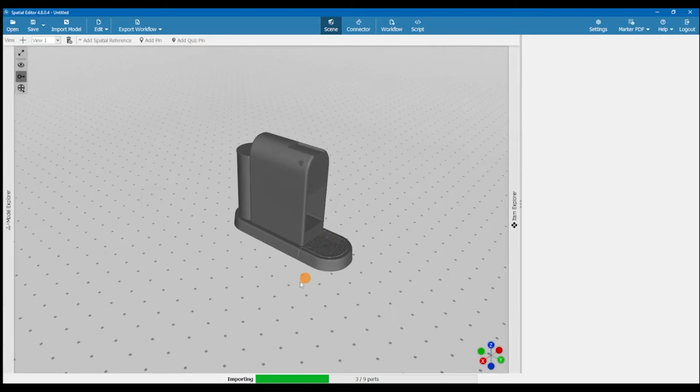We can see the scene is empty, so we import a model. I'm selecting a coffee machine model here and clicking on Open. Now we can see the progress bar with our model being imported. This might take more or less time depending on how large your model is and how many parts it has. In the meantime, we can play around, zoom a bit, check our model out, and wait until the importing is finished.

After this is done, let's go ahead, click on a part and go to Top Assembly to select the whole model. We can see here on the right that by default our model has been imported as a millimeter scale, but we can change this unit at any point in the workflow.

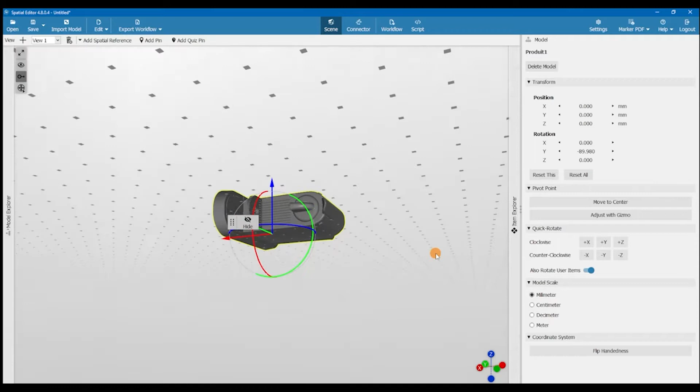We have the quick rotate menu where we can move the model with or without the pins and markers, but here we have it by default with. We can change it here on the side, but let's revert it back since our model was looking okay from the beginning. But if your model looks a bit wonky, you can use this quick rotate menu to put it looking up straight.

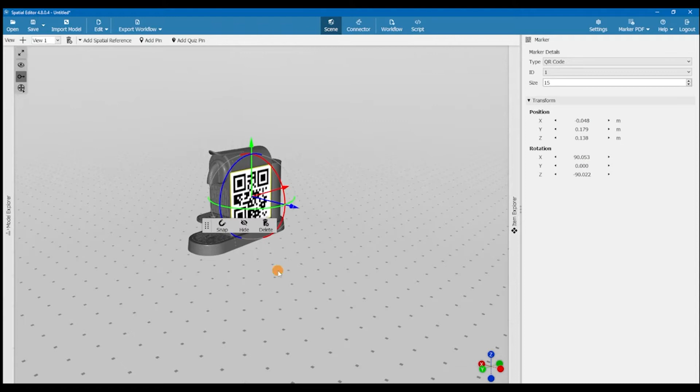And we are ready to add our spatial reference to start with our workflow. So we're selecting QR marker, we snap it on the model, and then we're using the transformation gizmo to move it around. We'll put it here on the side. I can also use the menu on the right to change the position or the rotation. Just make it looking upright here.

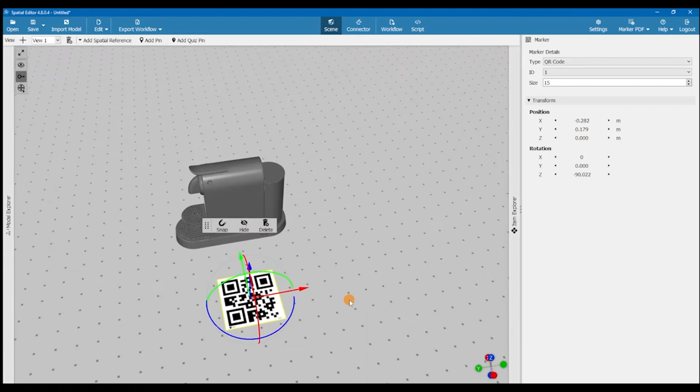I could also maybe make it sit on the floor, so zero here. Now that it's nice and flat, we can move it a bit closer maybe to the coffee machine, make a bit of space for the next marker. I can additionally change the size. Here I'm opting for 10 centimeter size, just to match our next marker. Maybe scoot it a bit closer.

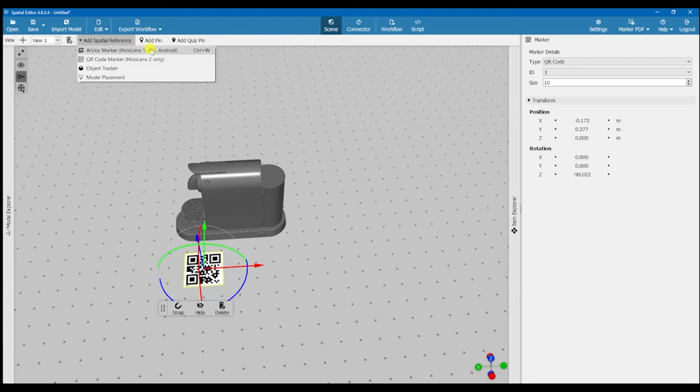Looks good. And I can go ahead and add an ArUco marker as well. Again, first we need to snap the marker on the model, but then we're free to move it wherever in space. Again, move it and rotate it as we need.

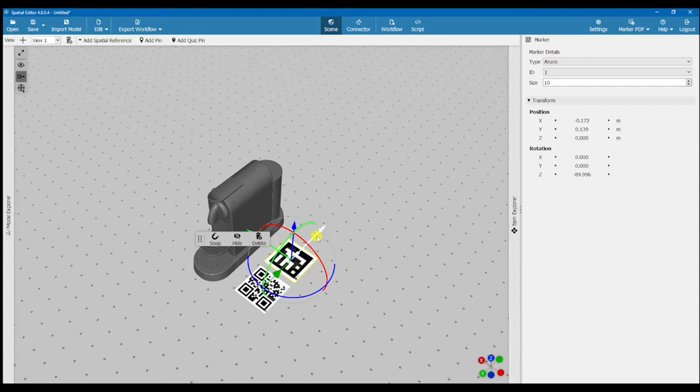It's important here to note that the distance between the marker and the model reflects the distance of the user to the model in the real component when using the Workplace app. So make sure you place it somewhere that makes sense, both in the model and the real component.

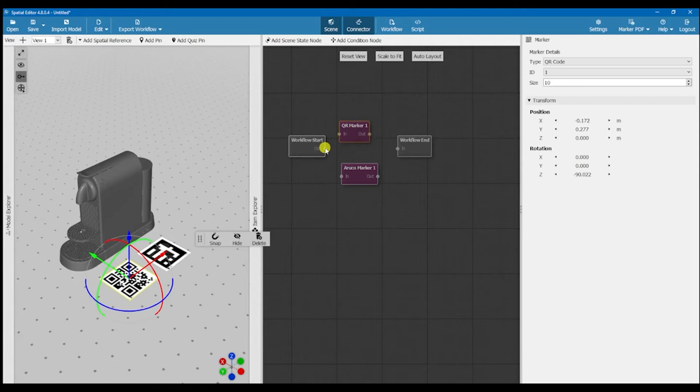Now that we're ready, we can take a look at the connector. We see these are connected with each other, but we don't want that, so let's delete it. Then connect the workflow start straight to both the markers. So the first thing that the user sees when opening the workflow is a prompt to scan markers.

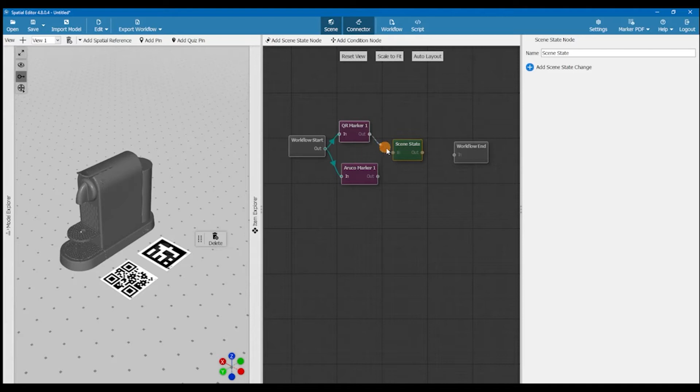As it is now, by default our model is not visible to the user in the Workplace app. So we will have to add a scene state node in order to make our model visible. We can place it here and connect it to both the markers because we want it to be the exact next thing that happens after scanning the marker.

We can give a descriptive name here, like make model visible. So that's what we're going for. Then we can click on add scene state change. We have some options here.

So we can make something interactable, therefore the user will be able to interact with the model, move some pieces here and there. This is only available for HoloLens 2 and will not work with mobile devices. We have visible, which is what we also want, where parts of the model can become visible or invisible. And of course we have a reset transform where the scene state reverts back to the original state, so if the user moved something, it returns back to its initial place.

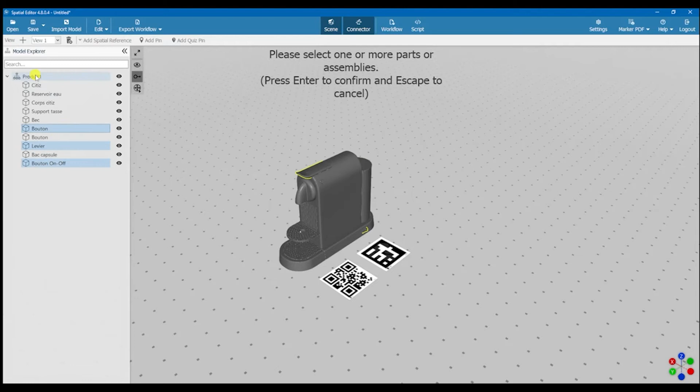So here we select on visible and add the target. We can click here and control click, but we can also use the model explorer. So here we can select one or multiple parts, or go straight ahead and click on the root to select the whole model. After pressing enter, we are ready and our model will be visible in Workplace, although we can see no difference here, but that's how it works.

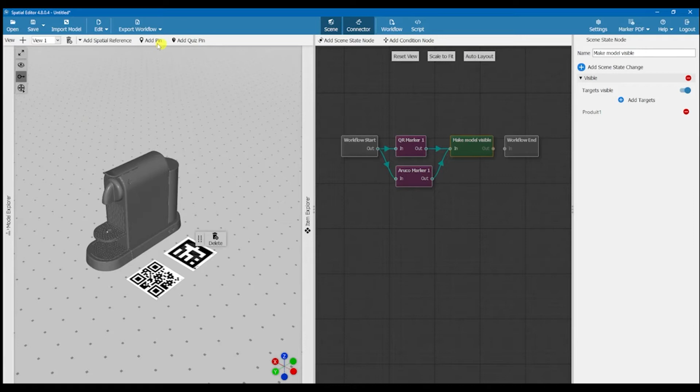Then maybe lay it out better, and we're ready to start adding our content. So let's go straight ahead and add our first pin. Again, snap it first on the model and use the gizmos to move it a bit.

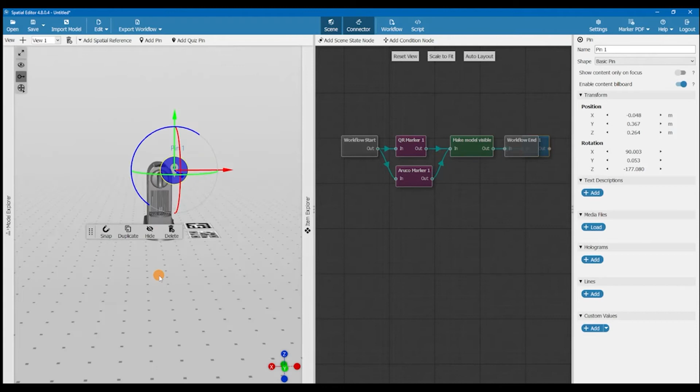I'm thinking an introductory pin, so we'll put it in the front of the model and it will tell us some general things about the coffee machine. I can use it here a bit higher, maybe a little bit more, put it a bit on the left, but it looks quite good to me, so we can name it. Let's say intro coffee.

We could also change the shape of the pin, maybe to a pointer, small or large, but let's leave it as it is for now. And we can add some content like a text description. So here, maybe we can say a quick intro, or maybe a quick look into a coffee workflow demo.

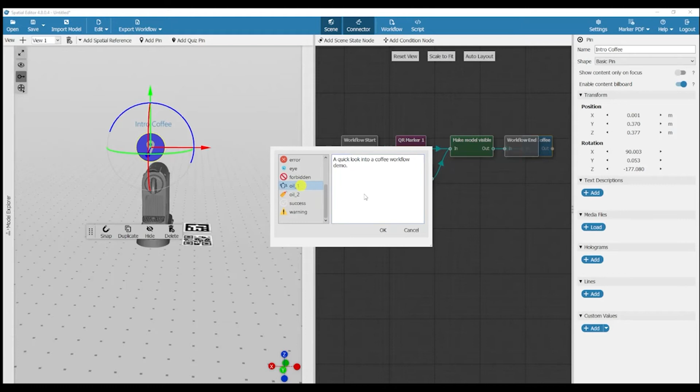And maybe use this can here. Although it's for oil, we can use this as a visual icon, so this appears over our pin. And we can add other content types like PDFs here, or visual, video or audio. And we can add a hologram.

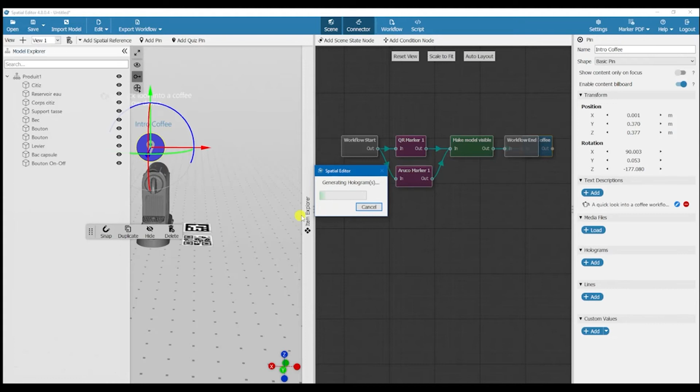So let's go do that. A hologram highlights parts or the whole of the model. Here we want to highlight the whole of it, so we go ahead and select it on the Model Explorer. And this generation might take some time. Now we create a hologram for the whole model, so it will take a little bit more time, but that's okay. And since it's ready, we can already animate it or maybe edit it.

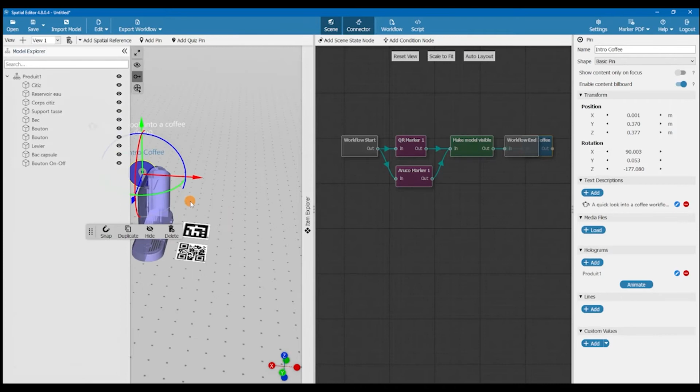So let's go ahead and change its color. Let's pick this purple and maybe make it also pulsing. Click on OK. And we see already the hologram has a different color here. And of course, we could also add lines or custom values for customized projects.

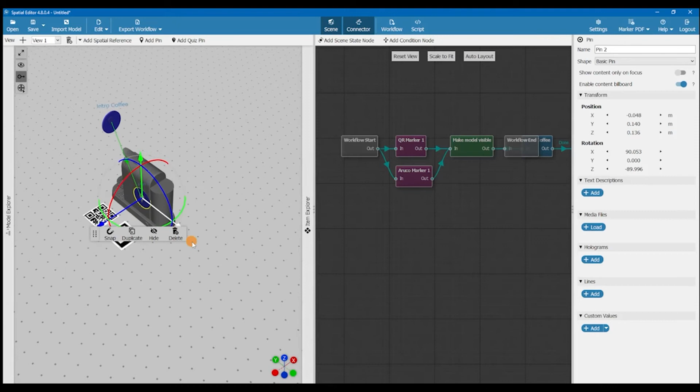So since we've given an intro to our user, maybe the next thing we want is for them to check for the water container for the machine to work. So let's put another pin in the back this time of the model. Again, try to move it around and rotate it with a gizmo. Place it somewhere nice that it makes sense. Let's move that out of the way.

A little bit higher. A little bit rotation as well. That looks quite okay. So we can now name it. Let's say check water.

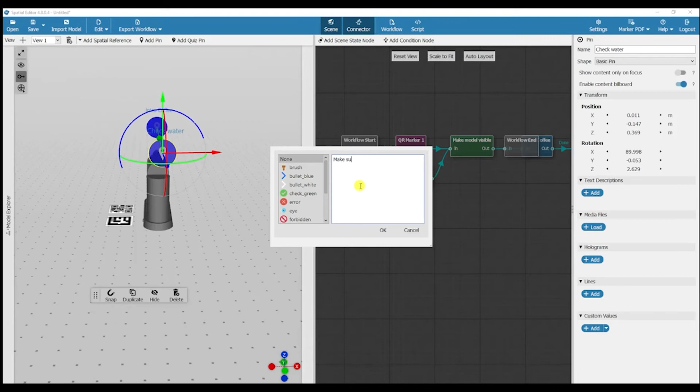And we can go ahead and again give a description to the user so that they know what they need to do for this part. And let's go with: make sure that the water container is full. And since it's a visual inspection, maybe we can give it an eye icon. Click on OK and we can see that there.

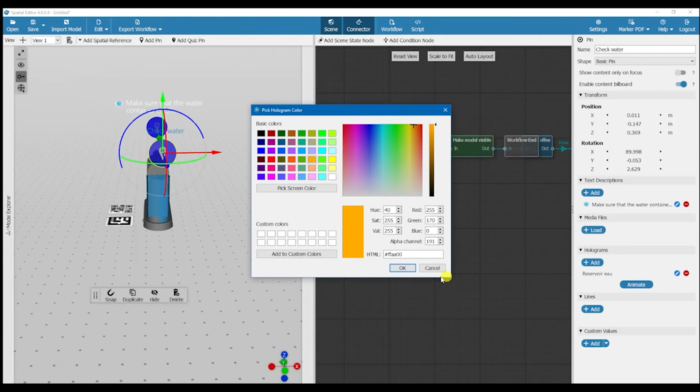And again, we want to bring our user's attention to the container, so we will add a hologram just with the container. And we can again edit it. Let's say we want an orange color for checking tasks. And we have pulsing. Pulsing holograms are very useful in bigger machines as well, as they attract the attention of the user. And we can see here our container is orange.

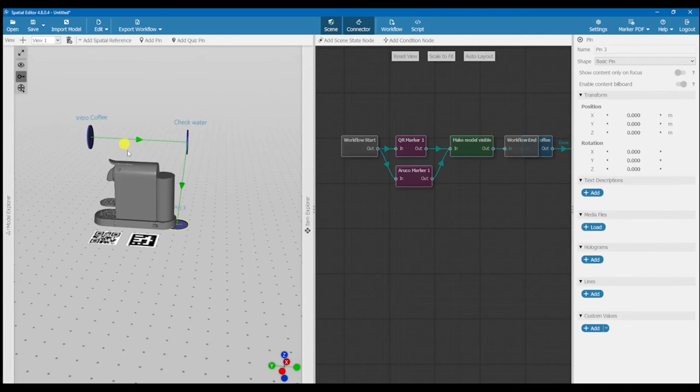Oh, that's a bit further away. Maybe let's move it a bit to the back. Looks great. And we can move on and see that the user also needs to check the capsule collector in order for the machine to work properly. So we move it a bit so that it points to the correct place.

Turn it a bit and give it a name. Check the capsule container, or maybe the collector. Check the capsule collector.

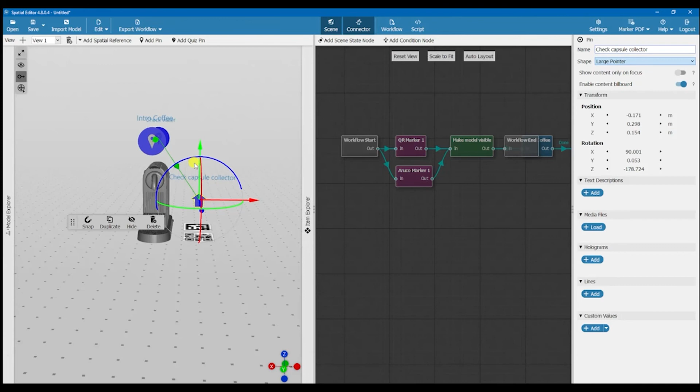Maybe let's make it into a pointer this time. We see it's looking upwards, so we're just rotating it to point to the correct direction, straight into the collector. And we can again add some descriptive text.

Let's say: check if capsule collector is empty. Maybe we don't have to put an icon now, so click on OK.

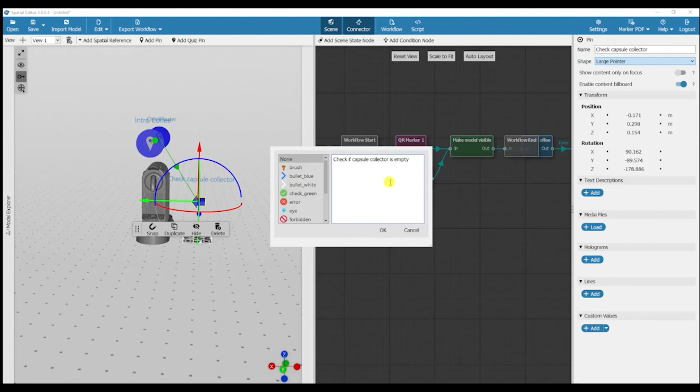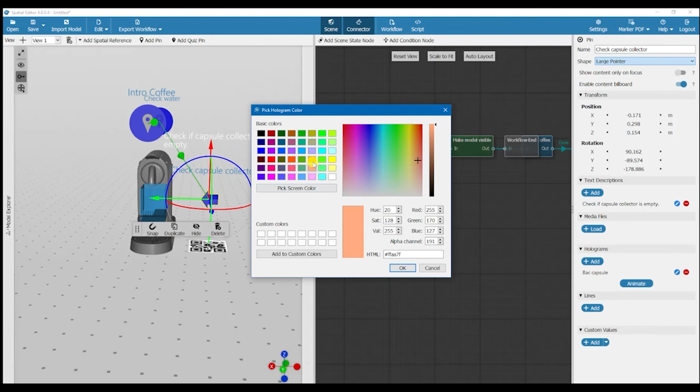And let's again add a hologram. We select the collector, press on enter. You see it's much faster now, the generation of the hologram. And let's again use the same orange, this one, or no, that one's the correct one. And make it again pulsing.

So here we can see our whole workflow, but first we need to connect our last pin to the workflow end. Let's go ahead and do that. Maybe check the whole, take a look at it whole, and we can see we have the start of the workflow. The user can scan the markers, straight away the model becomes visible, and then they start seeing one pin after the other, going through one step after the other in the workflow. And then the workflow is finished.

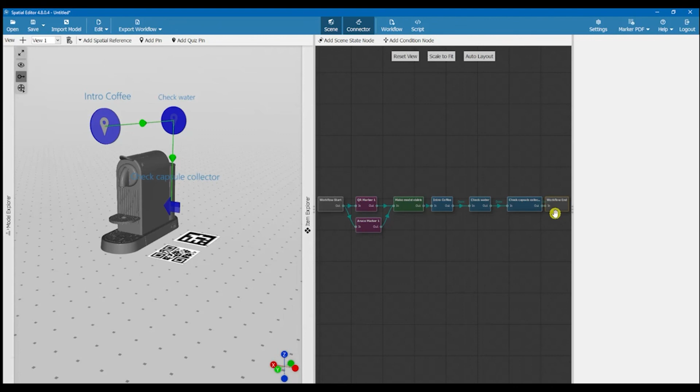This was a quick introduction on what one can do using the Spatial Editor. Of course, there are many more features, like adding quiz pins, for example, if you want to train your user towards something. And of course, there's a lot of transformations that you can do to the model itself.